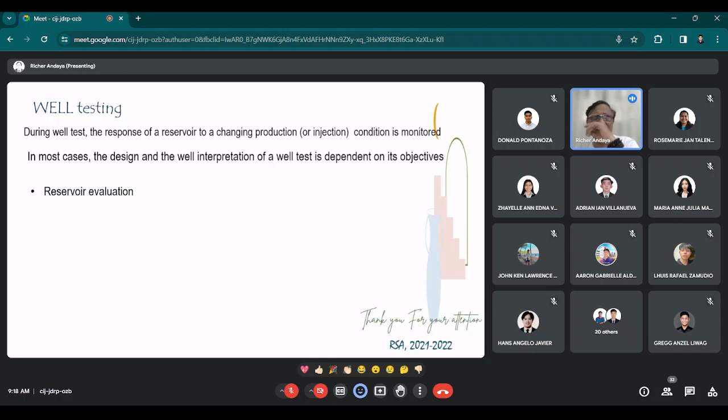Okay. So, sa reservoir evaluation, so sinabi ko na kanina, yan. To know the reservoir deliverability, properties and size, thus determination of the reservoir conductivity. Yung conductivity, ito yung productivity, yan tawag nito, reservoir conductivity, yung product ng permeability at saka yung thickness. So, initial reservoir pressure and the reservoir limits boundary. So, yan ang gusto nating malaman if you want to evaluate yung reservoir.

So, pag management rather, i-monitor natin yung performance ng reservoir at saka condition ng reservoir. Then if our objective is about reservoir description, ang gusto natin malaman dito para malaman natin yung description ng reservoir, we need a well test that will determine yung reservoir description.

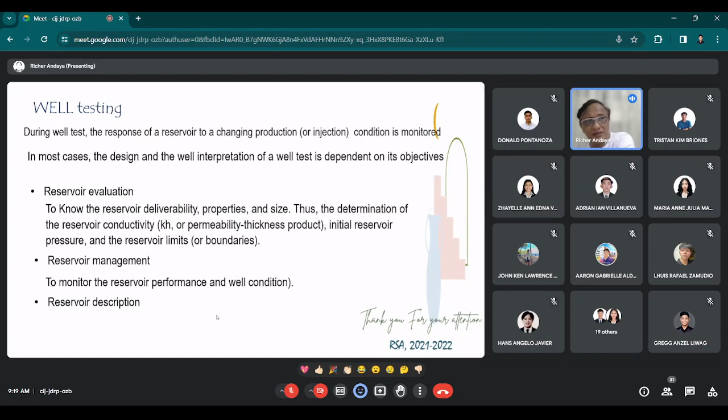Ang mga description na we need to know, usually yung rock types, okay? Or to know geological formation hosting oil. So anong mga rock types na nag-host ng oil? Gas and water. So yan ang objectives natin. Different rock types and yung mga stratigraphic interface, faults, barriers, and fluid front. Okay? So, yan ang gawa natin.

Okay? So, I think you know why we will be having well testing, well test analysis. So, pag gusto natin malaman yung deliverability ng reservoir, properties and size, iyon ang reservoir evaluation. So we need to conduct well test analysis that could determine the deliverability, properties and size. Okay? And pag management, we need to introduce a well testing that will determine the performance and condition of the reservoir. Pag description, so geological informations.

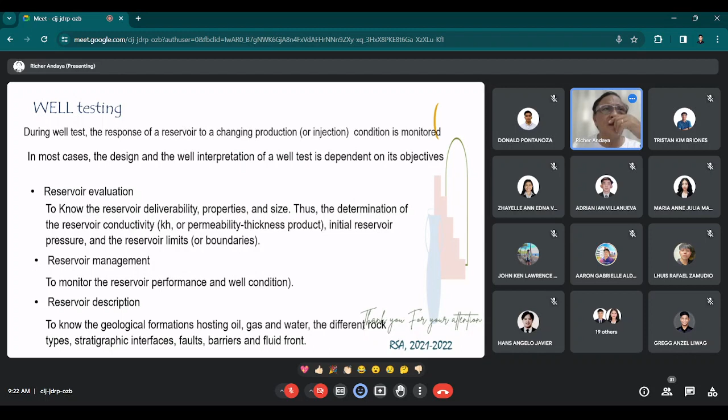Okay, thank you. So, ang unang method na I want to discuss is yung principle of superposition. So, itong principle na ito, method that makes use of basic mathematical technique known as principle of superposition. The principle states that the sum of individual solutions of a linear second order differential equation is also a solution of the equation. The technique may be applied to the radial diffusivity equation, describing flow in the reservoir under conditions used in various kinds of well testing procedure.

So, ang superposition, apply lang siya sa radial diffusivity equation describing flow in the reservoir under conditions used in various kinds. So, yung diffusivity equations, I will discuss this in detail, maybe in a later stage of the well test analysis topic. Iyan ang basic equation for yung production flow rate natin na Q is equal to something like that. Yan ang equation na pinagmulan ng mga equations na yan. Okay, so later we'll be discussing this.

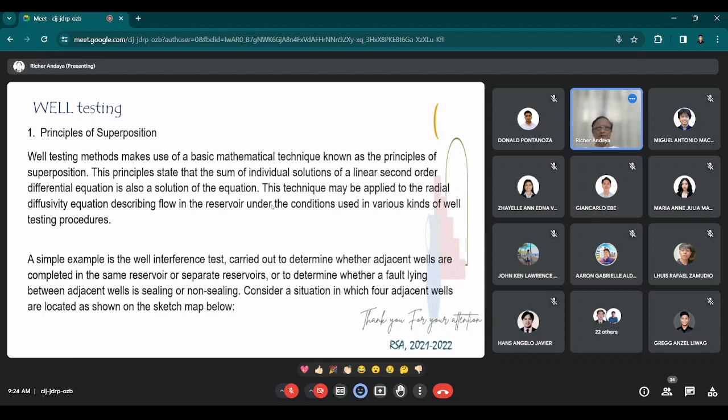So consider a situation in which four adjacent wells are located. So meron akong pakita na sketch. Yan. So we have four wells dito, 1, 2, 3, 4. So mayroong mga radius given, distance between the wells, both 1, 2, 3, 1, 4 na well. So yan ang scenario. So we'll try to apply yung method ng well interference test.

So suppose all four wells are initially shut in. So yung lahat ng wells na ito, 1, 2, 3, 4, i-shut in natin for a period so that pressure is stabilized. Well 1 is then opened and allowed to flow at a steady rate Q in reservoir barrels per day. Here we allow 1 to produce, while well 3 naka-shut in. So, i-monitor natin siya. Again, well 1 is opened and allowed to flow at steady rate Q, while the pressure in well 3, which is shut in, is monitored.

It will be found that the pressure in well 3 starts to decline. Kaya naka-shut in itong 3, para malaman natin yung pressure niya, yung stabilized pressure. If the pressure at well 3 starts to decline, meaning they are completed in the same reservoir.

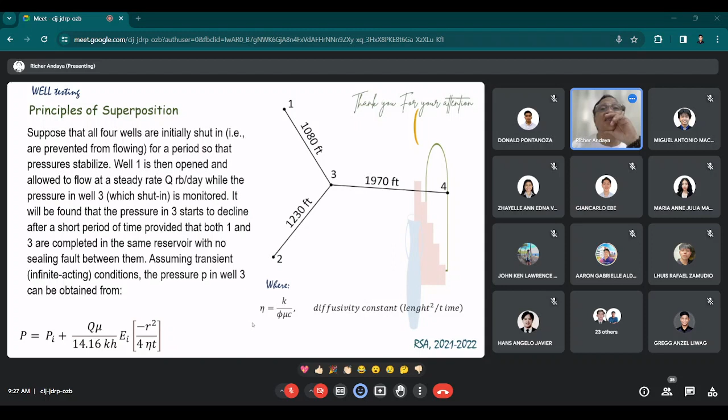Kasi we have derived this constant in field units. So mayroon tayong constant 6.33 times the permeability divided by the porosity, viscosity, and the compressibility of the formations. So, yan ang eta. Okay? I think familiar na tayo nito. So, since you're using these equations.

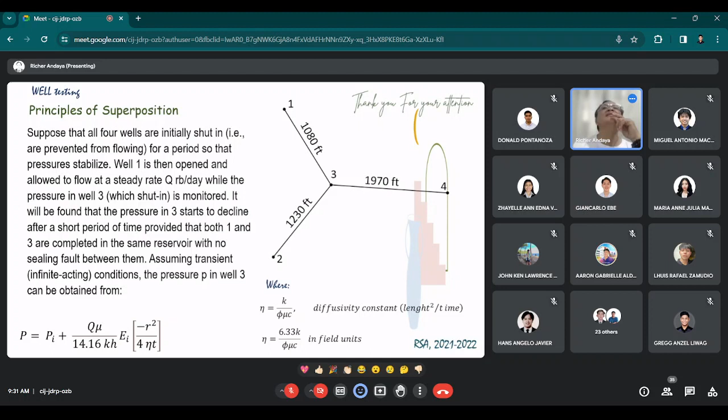Okay, so next slide. Ang equation natin, where P sub i is the initial stabilized pressure. Kung yung sinashut in natin siya, ano yung pressure? Both 1, 2, 3, 4. So ano yung stabilized pressure niya? And time is the time measured from the start of oil flow in well 1.

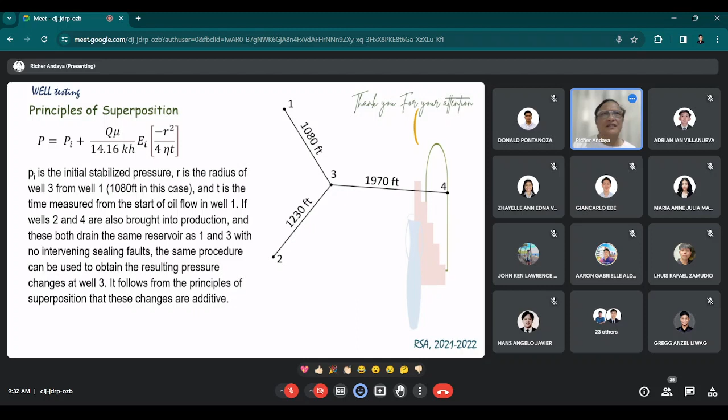If wells 2 and 4 are also both put into production, same time with 1, and these both drain the same reservoir as 1 and 3 with no intervening sealing fault, the same procedure can be used to obtain the resulting pressure changes at well 3. It follows from the principle of superposition that changes are additive. Okay, so ito, well interference test may also be used to determine the optimum well spacing.

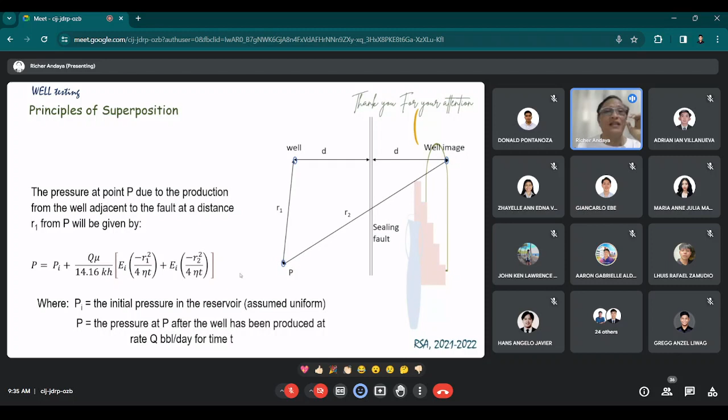Kung dalawang well tayo, ito yung isang well that will be observed, itong P. So i-image natin yung well sa sealing fault, the same distance, then get the distance between the P at saka well, yung well na we want to know using interference test. So Pi, the initial pressure in the reservoir, P sub i, is assumed uniform. The pressure at P after the well has been produced at q barrels per day for time t. Okay? So, in addition to its use, calculating the combination effect.

The combination of effects due to two or more wells. So the superposition principle is used in cases where different production rates are employed for successive periods of a single well. So pwede rin nating gamitin. Kagaya na kanina na 4 na wells, shut in yung well 3, pwedeng different productions yung mga well 1, well 2, at saka well 4.

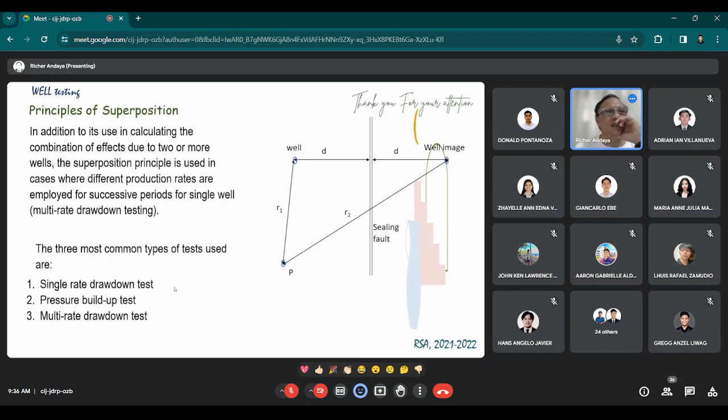That's what we have. So the 3 most common types of test used are single rate drawdown test, pressure build-up test. So as I've said, hindi na tayo aabot, I think, dito sa kuwan. We'll be only discussing hanggang pressure build-up test lang. As I've said, you will be having this in your well test analysis subject. So single rate drawdown test at saka pressure build-up test, but we'll be having also some discussion about multi-rate drawdown test. Okay, so example to this. So may example tayo nito.

Are you still listening? Are you still there? Can you hear me? Yes po, sir. Okay, thank you.

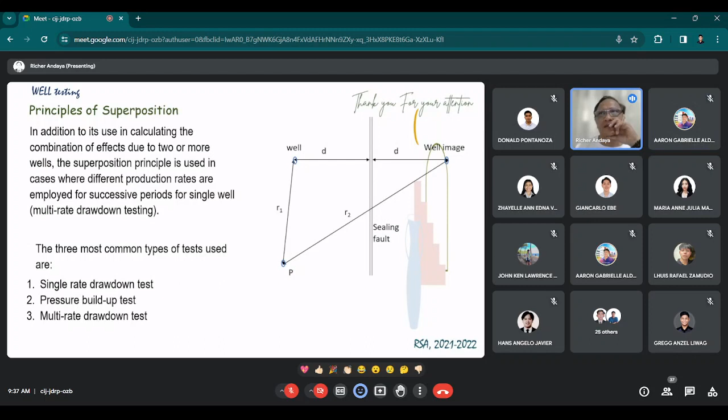For example, for the wells layout shown diagrammatically, meron tayong given yung mga properties. We have 1, 2, 4, 5. The 5 wells were shut in hanggang mag-stabilize, and well 1, 2, 4, and 5 were produced at different production rates. 265, 270, 287, and 260 stock tank barrels respectively. So ito yung using interference test. So ito yung scenario ng well natin.

We have well 1, well 2, well 3, well 4, well 5. So we want to know the connectivity between these wells. Ang instructions, i-shut in siya hanggang na-stabilize ang pressure. Walang stabilized pressure, but we are going to determine the pressure drop that will occur in well 3. So pressure drop between 1-3, 3-5, 3-2, at saka 3-4 after 10 days. Well 3, ito siya, naka-shut in siya. So what will be the pressure drop after 10 days of production?

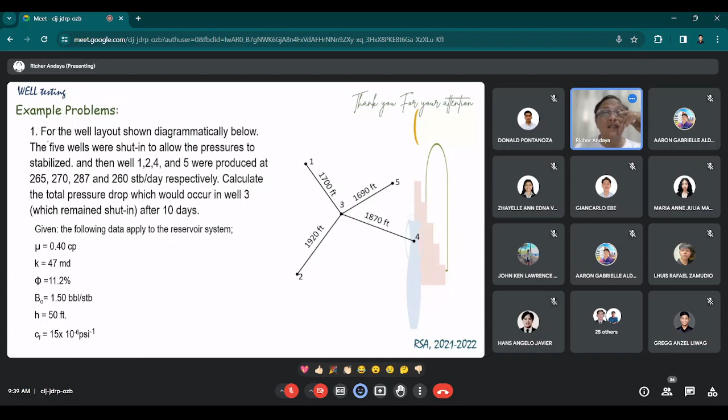Okay, so using the equation that we have in our previous slides, gamitin natin. Since change of pressure ang hinahanap, i-transpose lang natin. So meron na tayong pressure drop. Since the pressure drop is the requirement of the problem, substitute lang natin. Meron naman tayong diffusivity constant. Given ang permeability, given ang porosity, viscosity also given, and the compressibility of the formation is also given. Then diffusivity constant is equal to this. As I've said, always try to recalculate whether the answer is correct. So yan ang diffusivity constant natin.

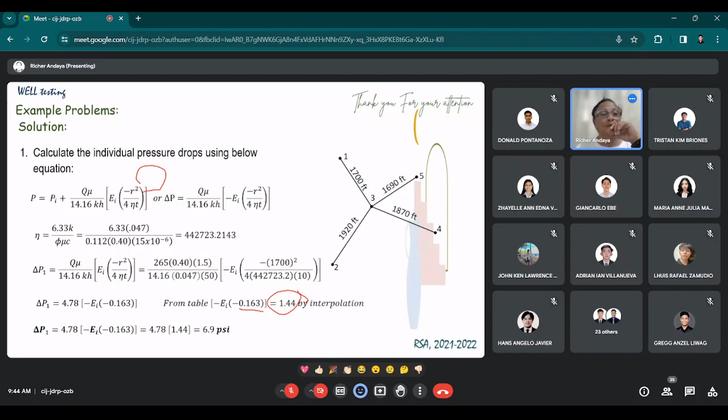But we need to get the equivalent exponential integral of this from table or from chart. Later on, I will show how you can obtain the value. So ang equivalent nitong value from table is 1.44, by interpolation, since there is no exact value of 0.163. Then the pressure drop at 1 at saka 3 is 6.9. So I will give you an idea on how to obtain 1.44. Questions? Yung 1.44, galing yan dito sa table. We will be having this table in the exam or any assessment.

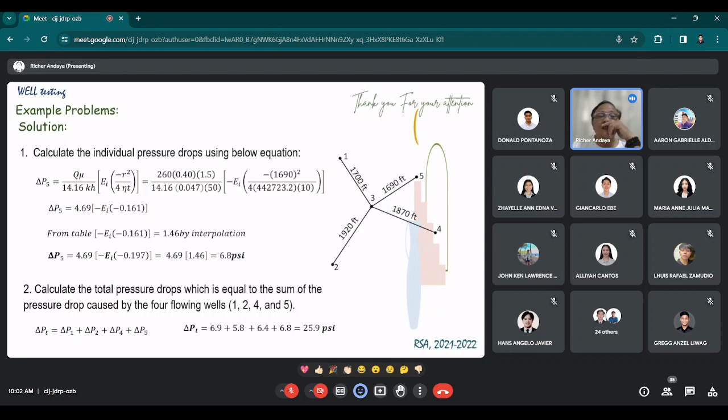So, if done, another example. Ito yung may example is yung may sealing fault. So, yan, the sketch shows the location of the wells adjacent to a sealing fault. So, may sealing fault siya. So, the reservoir has been shut in for a period. Well 1 is then opened and produced at 80 stock tank barrels. Well 2 remains closed. What is the pressure drop in well 2 after well 1 has been flowing for 5 days? So, ang distance natin, supposing ang X natin is 750.

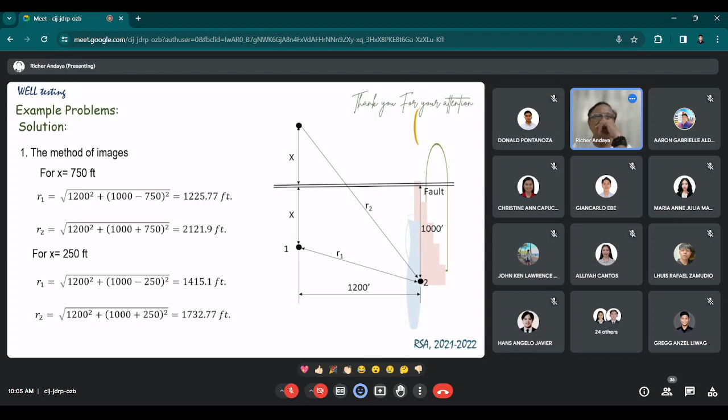So, then, gamitan na natin dito as we have discussed in the previous slides. Yeah. Substitute lang natin yung mga value. Solve for diffusivity constant. Yeah. Solve natin. Or simplify this. Calculate the change in pressure; the diffusivity constant can be calculated para hindi na siya masyadong mataas yung given dito sa equation natin. I-substitute na. Then after substitution, calculate. Okay?

So different regions, but the same properties lang siya. Same properties of the reservoir. So yan, ito yung kalabasan. This is the E sub i of negative X. Yeah, E sub i negative X. And then from chart or table, makuha natin equivalent dito.

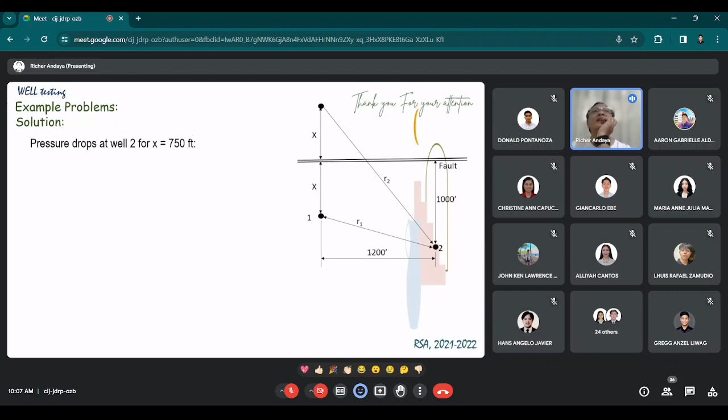So, ang equivalent niyan, ano? Yes. So, from table, by interpolation, you will obtain this value. Also, the other one, 1.22, you will obtain this value. Then, substitute na natin, then we can solve that the pressure drop at well 2 is 4.842 PSI.

Then, yung for 250, ang X, ganun din ang proseso. This is for 250 X. Same procedure, same properties, but only the X or radius is 250.

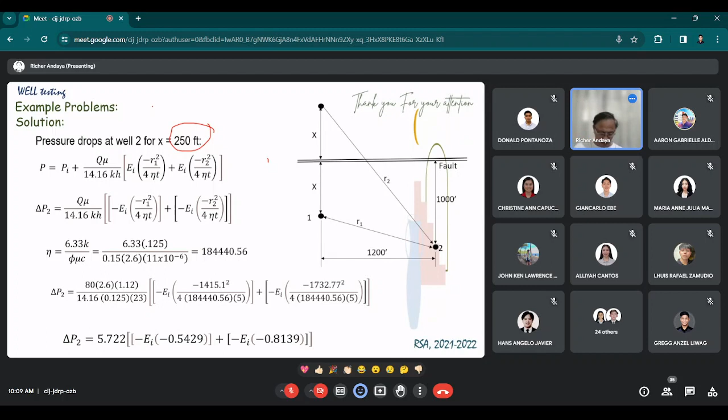Questions? Then refer to a table. We'll refer to this table, then we can get the equivalent for this, 4.7 pressure drop.

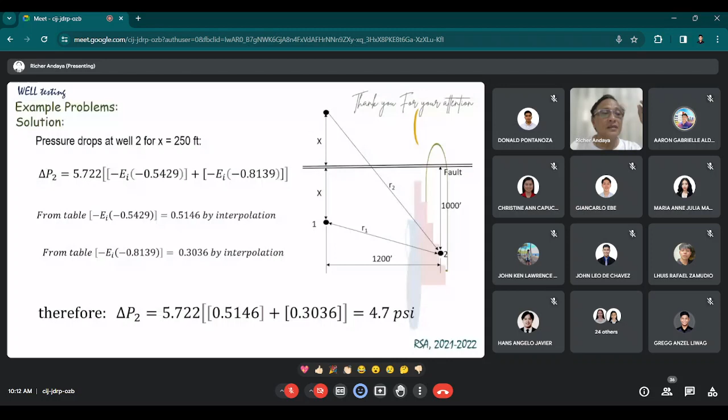So, questions? Are there any questions? May tanong? Wala naman po, sir. So, if there are no questions, then ito na lang.

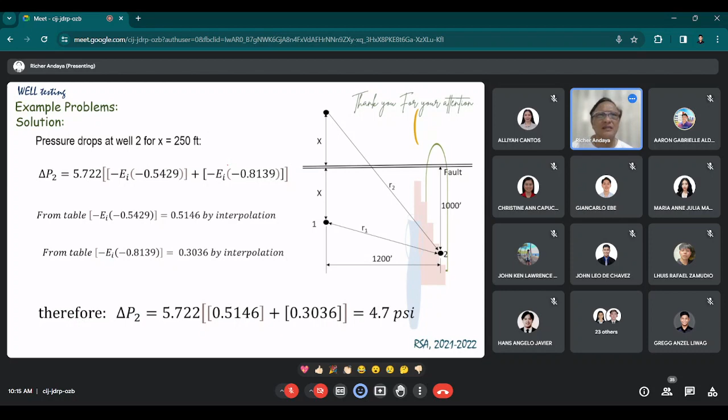So, ang total points sa lahat ng coursework is 50. So, 25 sa well testing and 25 also sa unsteady radial flow topic. But itong presentation, ang handwritten natin must not be in rush mode kasi I will deduct that. Dito, ginawa ko lang 5 points, but yung madalian na trabaho just for the due date, it will not only be 5 points deduction. Yeah.

So, arrange your coursework in accordance to topic, well testing, and unsteady radial flow. As I've said, hindi lang 5 points deduction sa coursework being done rashly, not in good format, or not presented neatly. Make the presentation of the coursework as neat and organized as possible. You must show illustrations, schematic diagrams of the problems needed.

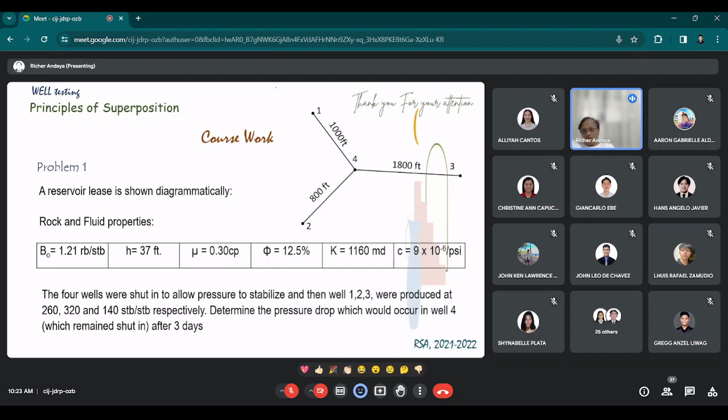Okay, so ito yung kuha natin. Problem number 1. I want you to start working with this. Are you done with the slides? Yes po, sir. Number 2, ito. Okay na din po, sir.